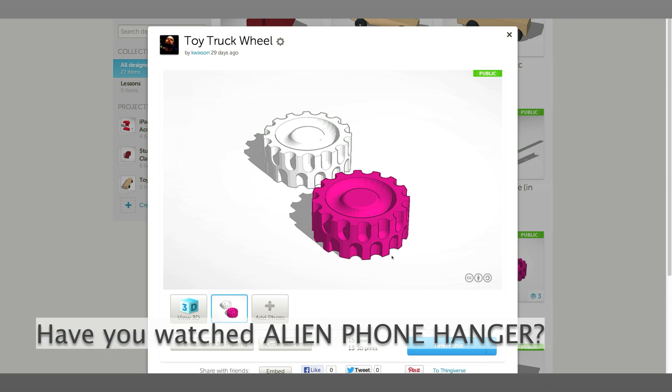So here you see our new project. This is going to be a toy truck wheel, and besides learning how to make this, we're also going to learn how to incorporate something that we make like this into another project later on. So let's get started. From the dashboard, I'm going to create new design.

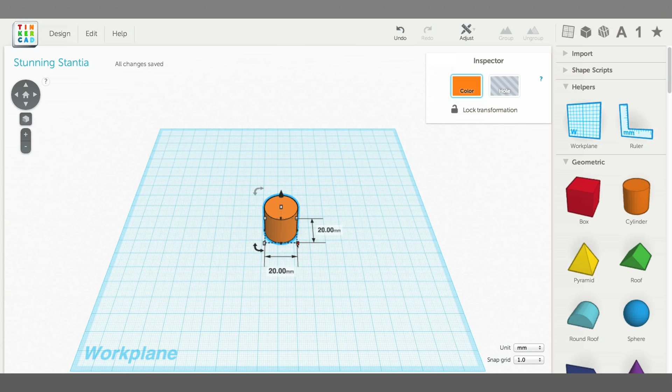I'm going to start by dragging out a cylinder, and I'm going to shift click on the corner to scale uniformly, and I'm going to make it 60 millimeters. And then I'm going to lower it to be half that, so 30 millimeters high. So this is our wheel. I'm going to change the color so we can see what's going on better.

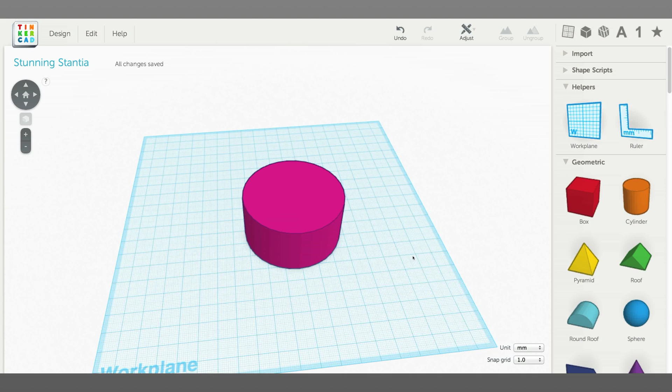And then I'm going to drag out another cylinder. Now this one is going to be part of the tread, and it needs to be less than half as high as the wheel is. So I'm going to shift click from the corner again to make a uniform scale. I'm going to bring it down to 9 millimeters.

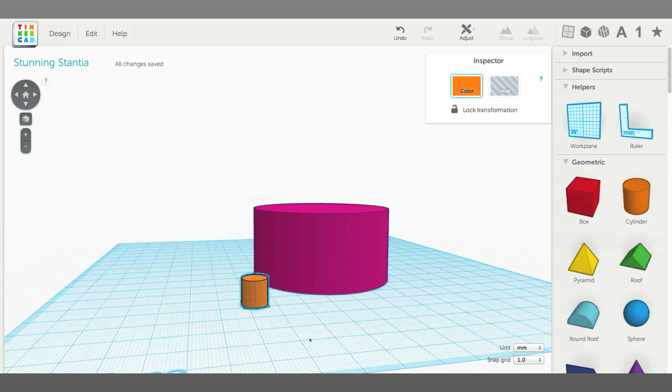I'm going to bring out a sphere, and we want that to be the same size as the cylinder. So I'm going to shift click for a uniform scale and bring that down to 9 millimeters as well. So we have these two objects, and it's not easy to get these two things lined up perfectly straight. And in order for this to work, they do have to be lined up perfectly straight.

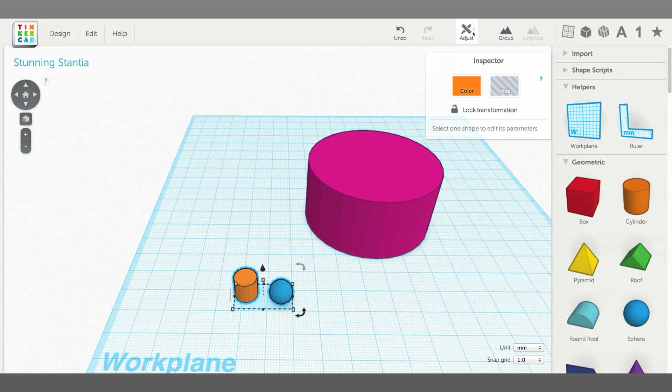So here's a new thing. Select both of them by dragging a marquee. That's what that square is called. Dragging a square around both those objects. And then go up to the menu and click on the Adjust button. Choose the Align option, and you'll see this sort of arrangement of lines and dots appear. These are alignment handles.

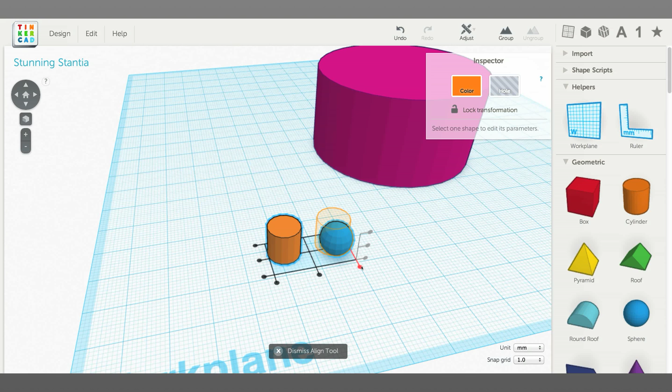And so if I want to align something in the center, I click on the center dot, or if I want to align it on the edges, I click on one of the edges. So I'm going to align it on the center in that direction. So there it is, it's lined up. And then I'm going to align it in that direction. Okay, so they're both there. It's just one is completely inside the other, which is fine.

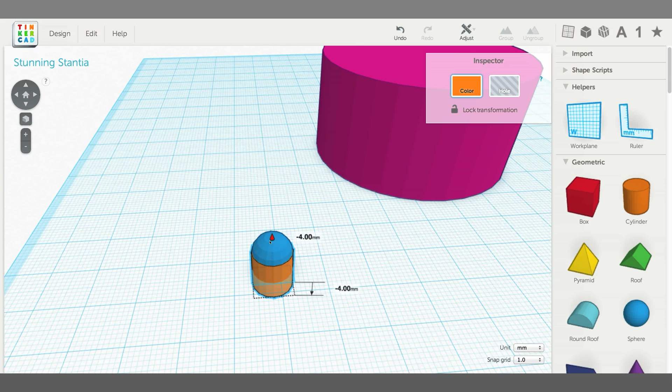We want the sphere to be halfway up the cylinder. So I'm going to lower the cylinder down. And exactly half of 9 would be 4.5. But you can see I can't go to 4.5. I can only go to 5 or 4. Well, I'm going to drop it there at 4 for a second. Okay, so it's close, but it's not perfect.

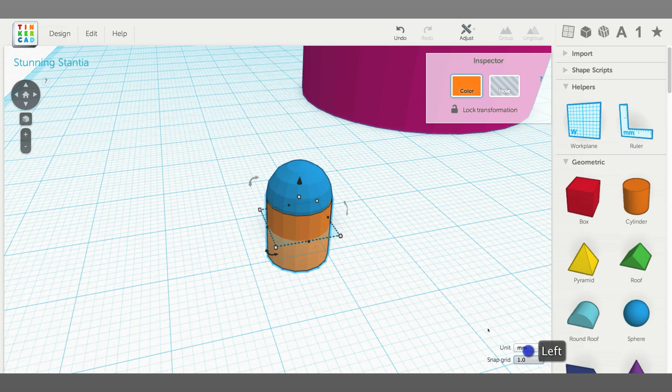The reason it only goes in 1 millimeter increments is because that's what the snap grid down here in the corner is set to. So if you change that to 0.5, then I can snap in 0.5 millimeter increments. And now instead of being at -0.5, I can bring it up 0.5 millimeters, and now I am exactly lined up. Isn't that cool? So let's group those.

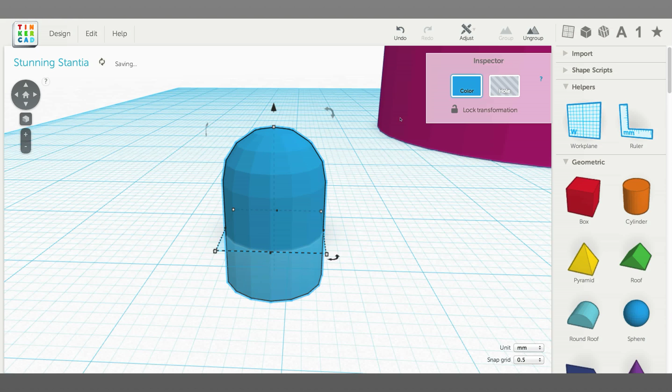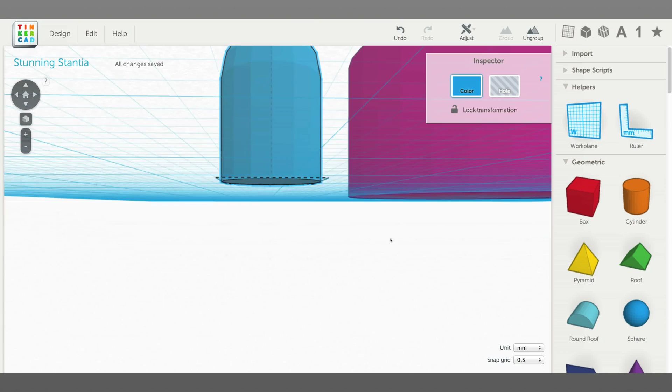And I need to bring this whole thing back up. Actually, I'm going to need to bring it back up until it is 0. So let me scale back here. All right, so now it's right on the work plane along with the wheel.

Now I'm going to move this over so that it's overlapping the wheel, and I want it to be just a little bit less than halfway into it. So you can see the point here, see that dot, that's halfway. And I want that dot to be just outside of the wheel. Okay. Where along the wheel doesn't matter.

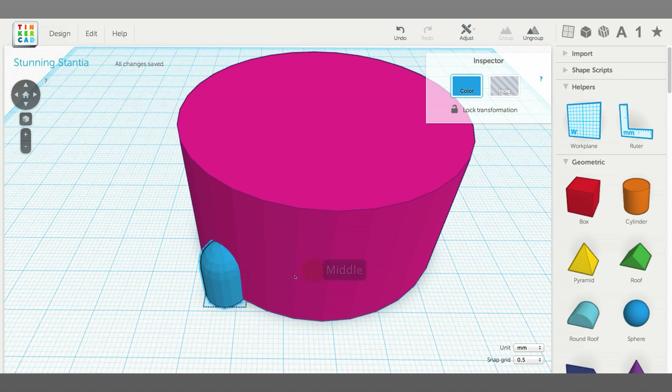So this is part of the tread, and we're going to cut the tread out of the wheel by making holes from the tread pieces. We're going to have a bunch of tread pieces all around the outside. So how do we do that? First off, we need to know how many tread marks we're going to have. So let's just pick a number. I'm going to say 16. 16 usually works out for these kinds of projects, for the circles.

Now, we need to do a little bit of math. So we have a circle, which is 360 degrees, and we have 16 treads. Now we already have one, and if we put in 16, then we would end up with 17. And that's not what we want. We want 16. So we have to subtract 1, the one we already have. And so that'll be 15.

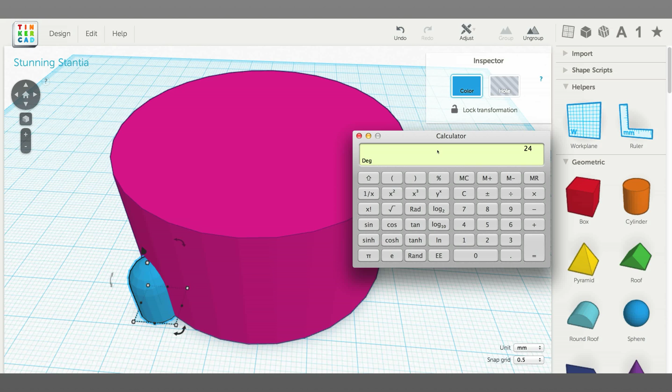So we're going to divide 360 by 15, and that gives us 24 degrees. Okay, so we're just going to remember that for a second. Now I'm going to need to duplicate that tread.

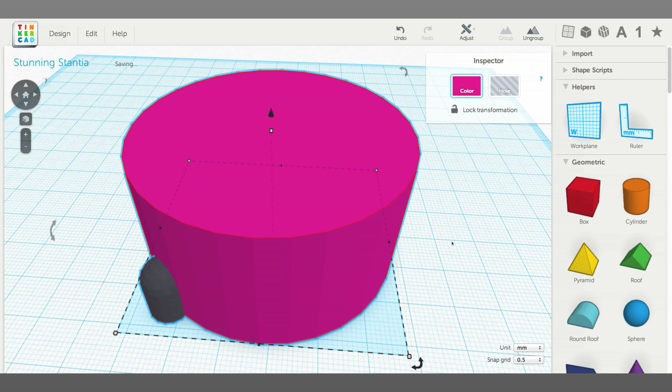And once all the changes are saved, I'm going to turn that into a hole. I'm going to shift click on the wheel so that both the hole, tread, and the wheel are selected, and click on group. And once it says that all changes are saved, then we can rotate it. So I'm going to rotate the wheel, and we're going to rotate it 24 degrees, because that's the number we calculated earlier.

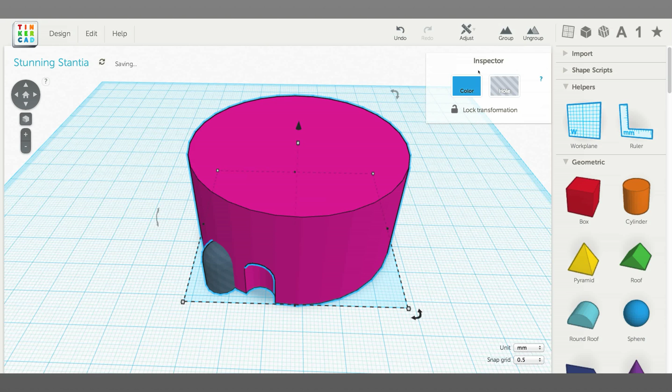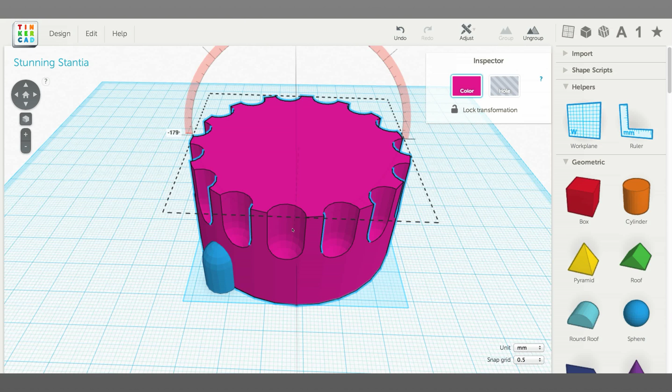So there we have one tread hole. Now it's just a matter of doing that over and over again until we get all the way around. Okay, so now that we have one side done, time to do the other side. So I'm going to select just the wheel and flip it over, which means 180 degrees. Now if I look, what do you know? I'm right there halfway in between. So we will alternate.

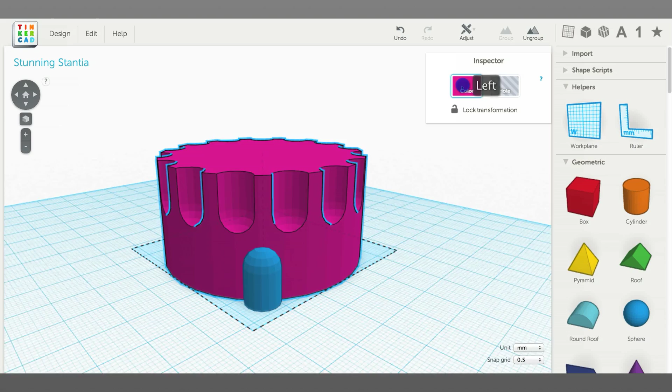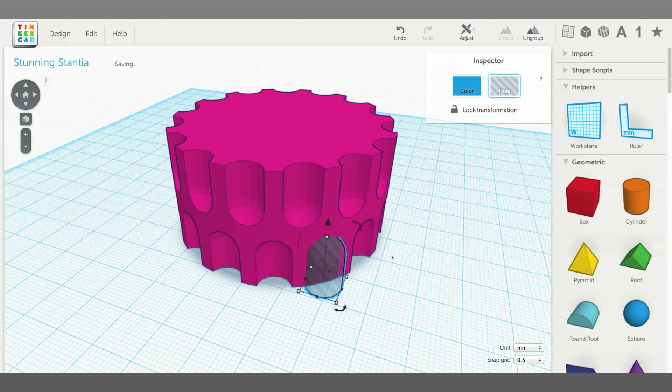Now it's just a matter of doing the exact same thing. So duplicating, turning it into a hole, grouping it with the wheel, rotating it 24 degrees, and so on. So let's get that done, and then we'll jump ahead to the end. Okay, so for the last one, we're not going to need it anymore, and I can just turn that one into a hole and group it. And we're done with the treads.

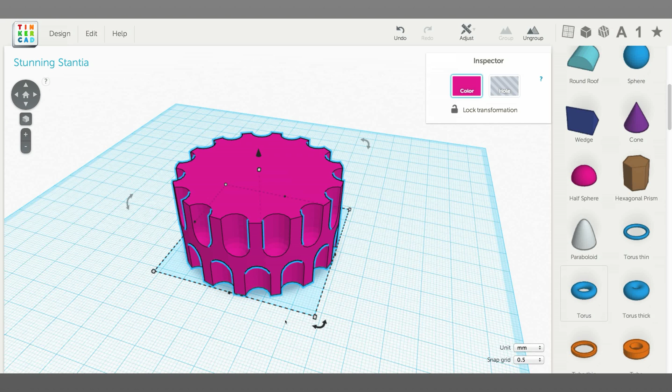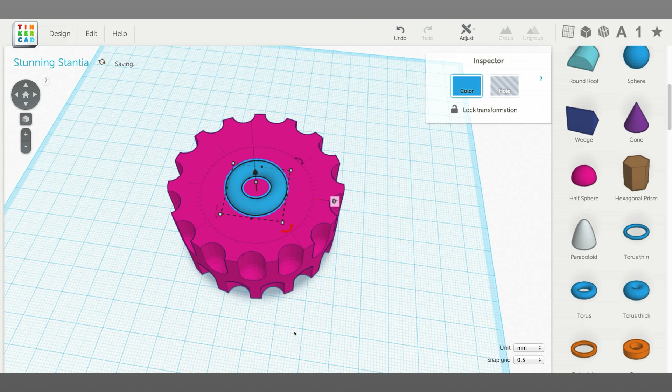Now we're going to add a feature to the top here to make it look cool. And we're going to add a torus. I'm going to use just the regular torus. We don't need the torus thick or anything like that. I'm going to pull that out and drop it down there. I'm going to bring it up close to the top here, just so I can get a sense of how big it needs to be. I'm going to do a uniform scale by holding down the Shift key.

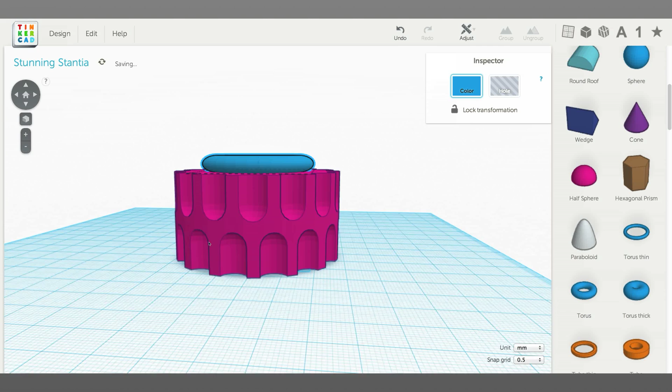And get it in position. And it needs to be a little bit squat, so I'm going to make it a little bit flatter. Now we have kind of a flat donut. Time to use the align again, because I want that torus lined up right in the middle. And then I'm going to manually drag it down again so that it's a little less than halfway through.

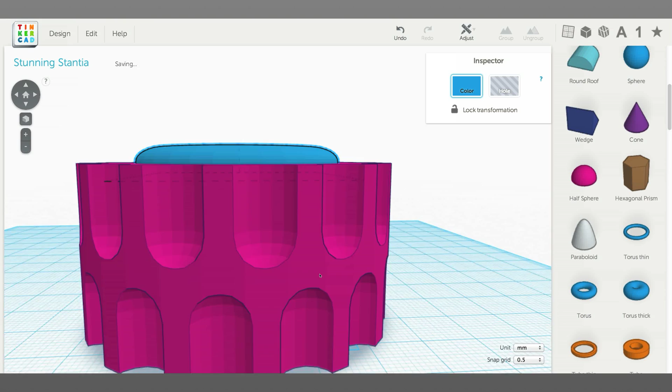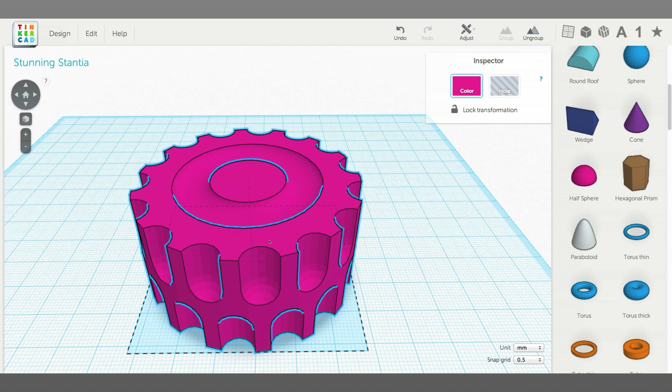All right, so that looks pretty good. Now all I have to do is turn that one into a hole and group it with the wheel. There we go. So we have kind of a cool looking wheel going on there. And I'm going to edit the properties, give it a name.

Remember that sharing is caring.

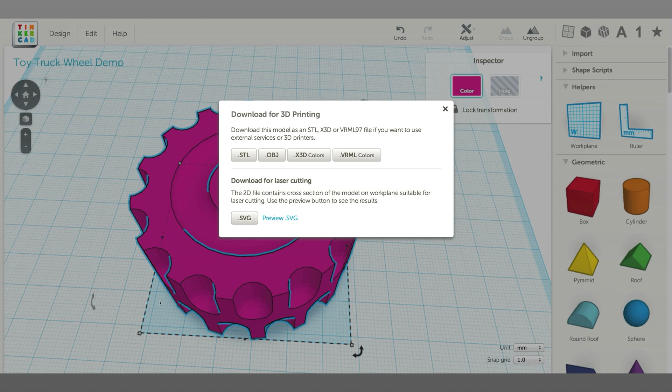Okie dokie. And then what I need to do is save this in such a way that I can reuse it again in another project. So to do that, I'm going to download for 3D printing. So we don't actually need to 3D print this just yet. We're going to save it as an STL file. Okay, so if you look down here in my browser window, it's been saved.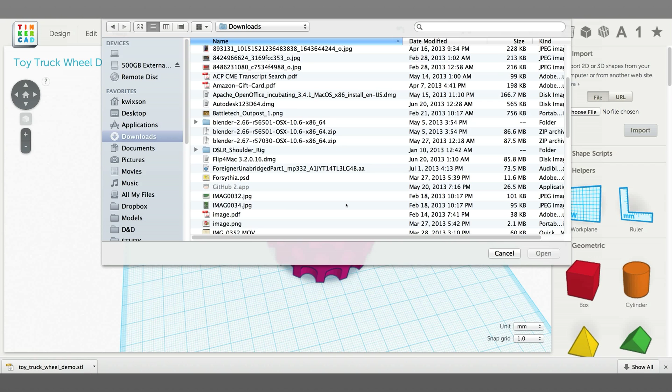Now you wouldn't necessarily bring this into the same document, into the same model, but we are going to load it up just to show you how it's done. So over here on the sidebar, there's an import section. And it says import 2D or 3D shapes. So I'm going to choose a file and go to downloads and look at today's file. So I've got toy truck wheel demo there. So I have it selected. Scale is 100, meaning it's going to come out the same size as it went in. And click the import button.

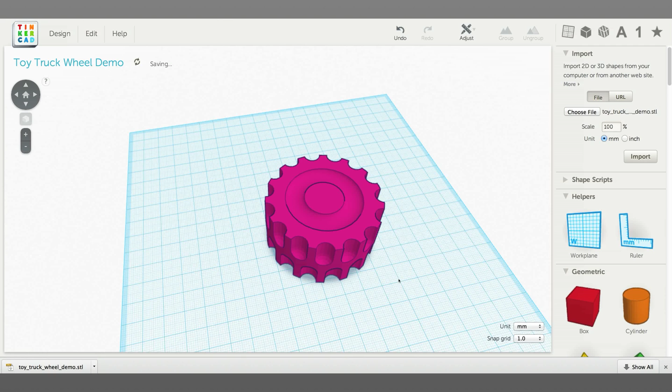Now here's where it's important to wait and be patient. It takes a while for it to render, meaning it takes a while for it to show up, to appear after you upload it. So I'm going to be patient and wait for it to appear there. It's going to appear right in the middle. Okay, so I'm going to move this out of the way, and we have the imported one and the one we started with.

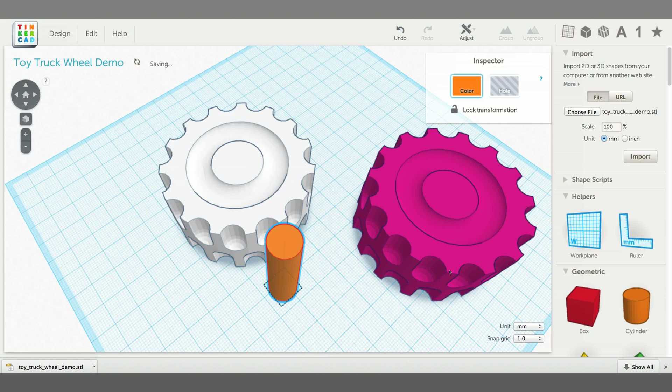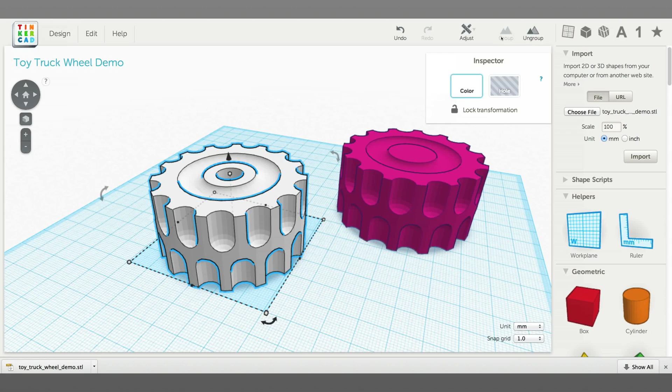Notice that I can ungroup the one that we built in this document, but this one can't ungroup. It is what it is, but it works just like any shape that you would pull over from the side now. So for instance, you could add an axle to it. And so there we have a wheel with a hole for the axle in it. Which is very nice. We can use this, and now you have a wheel that you can put into any project you want. So we'll use this later on in another project.

And until then, see what other kind of designs for wheels you can make. This isn't the only kind of shape. You can do different shapes for the treads, and you can do different numbers of treads. So experiment, play, have fun.